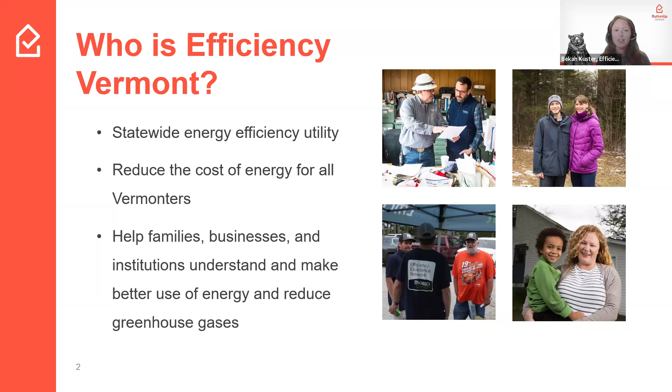We also help to facilitate and sponsor the Button Up Vermont campaign, which is Vermont's annual campaign to help Vermonters prepare for winter. This is really a campaign made possible by a statewide collaboration of so many different partners, including utilities, community action agencies, town energy committees, so many folks who come together each year to make this campaign possible. If you're interested in learning more about Button Up Vermont and all the resources available, there's a great website, buttonupvermont.org, that you can visit, and that's also where you can find all the recordings and information from previous Weatherization Wednesdays.

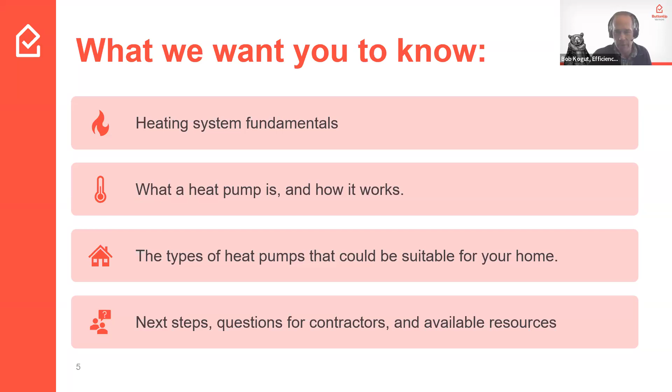A good place to start is to ask yourself some questions about what you want from a heat pump, and what are your goals for using a heat pump. What do you want it to do for you? Those questions might be, I want to reduce my energy expenditure. It might be, I want my home to be more comfortable. Goals might be, I want to be able to cool it in the summer on the hottest days. Starting with your goals is a good place to start.

And then the next thing to think about is, what do you currently have in your house? What's your current heating system? What's your current cooling system? What's your distribution system? That means, do you have ducts, radiators, an in-floor kind of distribution system? And then, what's your budget? Those are probably the best places to start, the first things to think about.

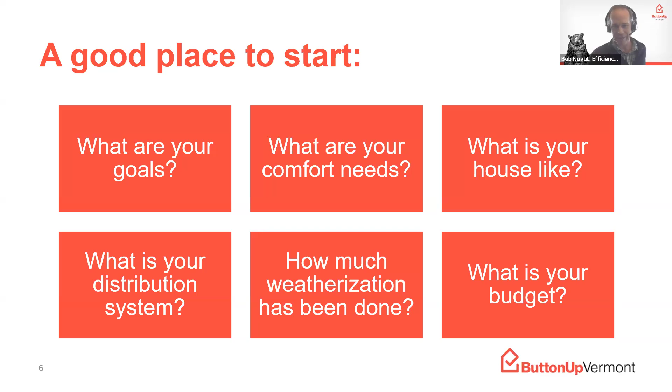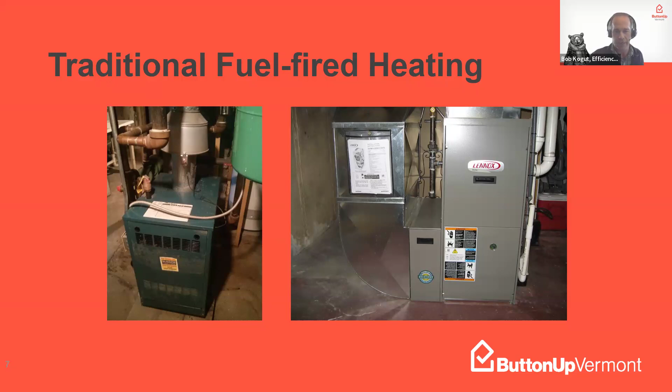So just a quick overview of traditional heating systems in homes. Generally, they burn stuff to create heat and distribute that heat through your home. We're looking at a couple of furnaces here in basements. Common ones in Vermont are oil burning furnaces, propane furnaces, and in some areas of the state, more Chittenden County, natural gas burning furnaces. And then, also probably in a later slide, wood burning - pellet stoves and traditional wood stoves as well are traditional heating systems. All of them burn something to create heat.

Different types - usually, boilers is one type. That's a furnace that heats water, distributes the water through your house, and the water is in radiators. It could be in-floor heating. Those systems require the furnace to burn the fuel to create the heat, pumps to move the fluid around through the house, valves to control where it goes. And then the last part that you see in your living spaces is the radiators, which could be - there's a lot of different types of them. Baseboard ones are very common. Sometimes boilers for your heating system can also provide the hot water for your domestic hot water supply.

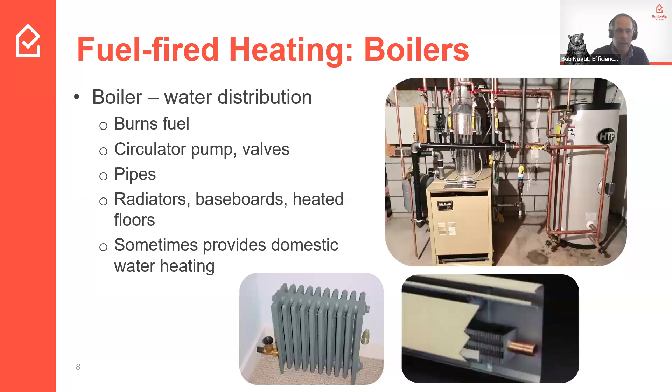Okay, looking at the next slide here. So furnaces - again, I've said this a few times, furnaces burn a fuel. This slide is about more of a forced hot air system. The last slide was about boilers, where your furnace is heating up water that gets distributed through radiators. Another very common system, the one I had in my house before I switched to heat pumps, was a forced hot air system. So there's a furnace somewhere in my house - it was in the basement.

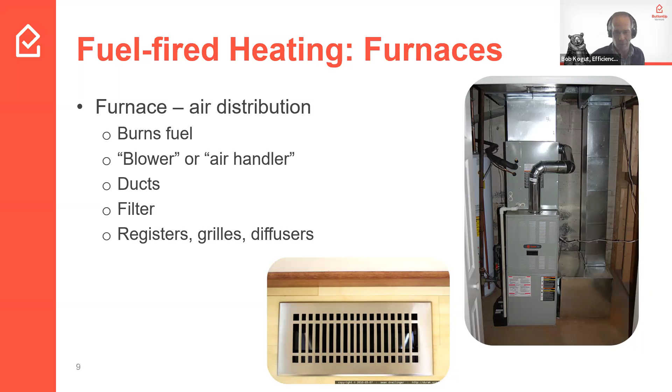Mine was propane, burns propane, creates a lot of heat. And then there are a series of ducts through the house, and there's a blower system called an air handler. Filters are involved in that system to filter the dust out of the air. And then the thing at the bottom of the picture here is a register, a grille, or a diffuser - all names for where the hot air comes out in your house.

Heating systems without distribution would be a wood stove, a classic example in Vermont. That means there's no pipes to move warm water around throughout your house, and obviously no ducting. They heat rooms well - open floor plan houses can be heated pretty well without a distribution system. Wood stoves are common, as are pellet stoves, things like Rinnai heaters, and electrical resistance heaters.

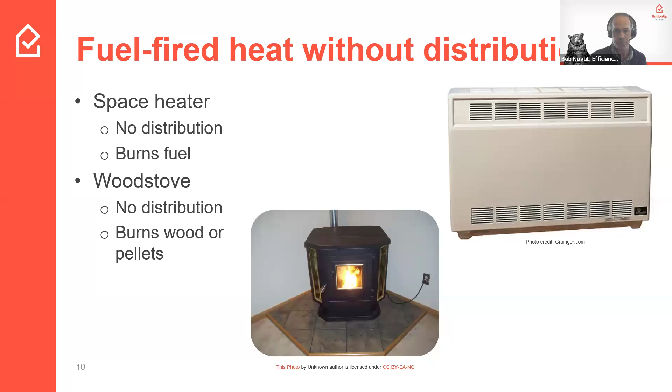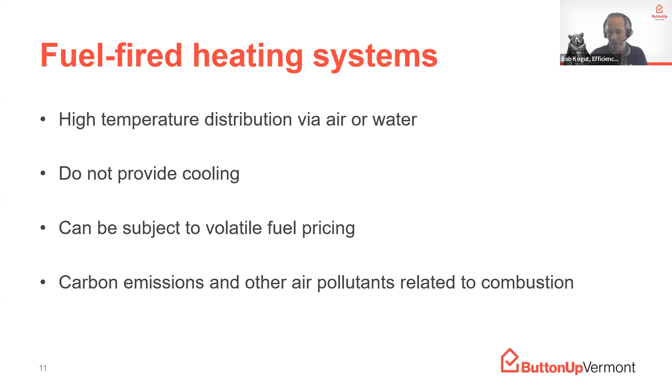So what are some of the characteristics of fuel-fired heating systems? They create high temperatures - burning things creates a lot of heat. They do not provide cooling in any way; no furnace can provide cooling. Oftentimes the cost of the fuel you're burning can vary a lot, and that's true for oil, propane, even cordwood. And then anything you burn creates carbon emissions and air pollution from burning that fuel.

So what about heat pumps? How are they different? Heat pumps run on electricity. They don't burn anything, and they can also provide cooling. A typical heating system we discussed earlier, the furnace, you burn something to create heat and spread that heat around your house. A heat pump moves heat from one place to another. So it's an interesting system.

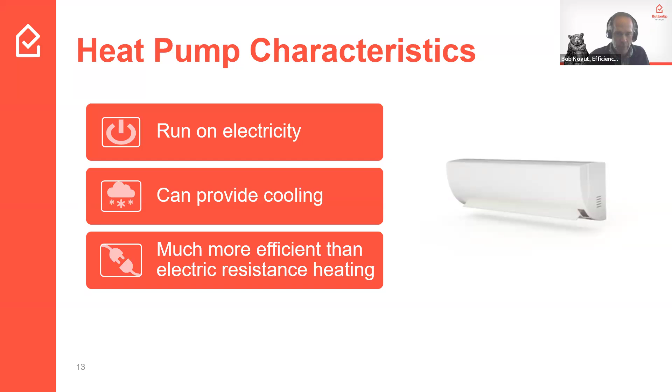What it does is move a special fluid called a refrigerant around through a continuous loop. That refrigerant, through the use of a compressor built into the system and what's called an expansion valve which drops the pressure, lets you pump heat into this fluid, and out of this fluid, through your house.

So a heat pump typically always has two different radiators, which can be called a condenser or an evaporator. One is inside your house to either push heat into your home or create a cool surface in your home. The one outside is either gathering heat from the outside to bring inside, or expelling heat outside if you're cooling. One of the magic parts of a heat pump is that they're reversible - a series of valves let the thing run essentially backwards.

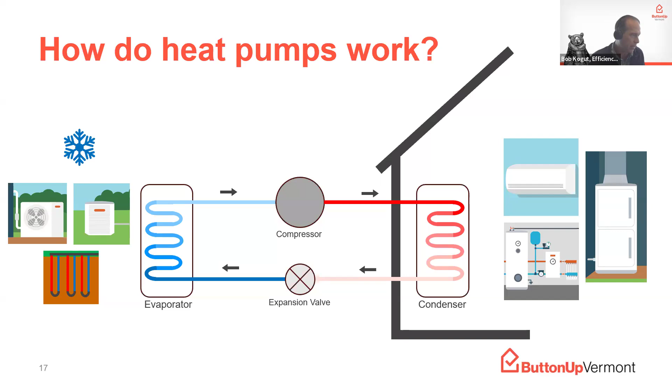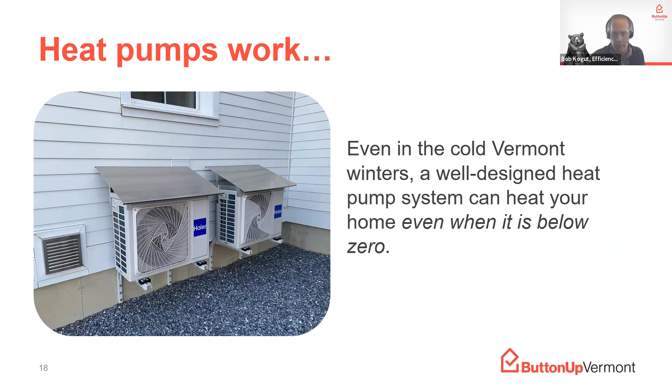This is showing a couple pictures of what an outdoor unit looks like, kind of the graphics, and then the indoor unit - they come in different styles. I believe later we've got some pictures of actual ones, which should be more helpful. Point I made earlier, but reiterate it - here's a picture of two outdoor units of a heat pump system. Like I said, they can provide heat into your house even when temperatures are below zero, down to as low as -20 Fahrenheit.

So there are 4 different types of heat pumps, which I'm going to cover the first 2, and Steve's going to jump in and cover the second 2. The first one is called a ductless heat pump, also called a mini split, which I'm sure many have heard that terminology. The other kind is a ducted system - we'll get into that. Steve's going to do air to water, and he's going to do ground source, also known as geothermal.

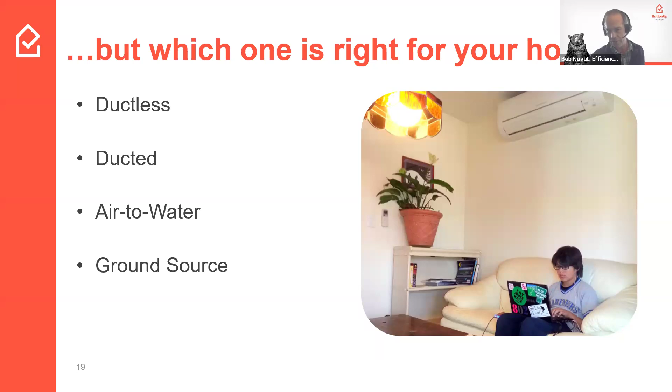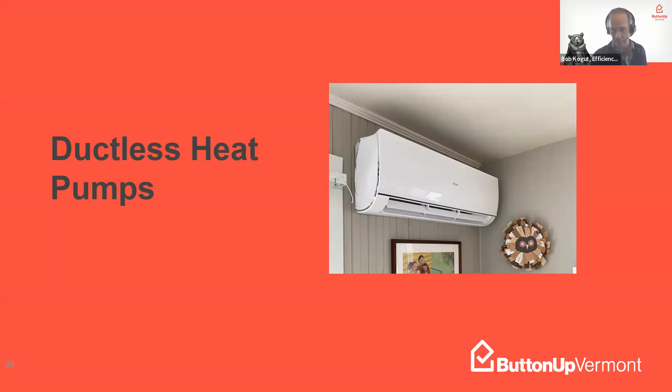So ductless - here's a picture of a typical indoor unit. This is mounted high on a wall, providing heating or cooling inside your house. There are other options other than these wall-mounted, near-the-ceiling units, but those are quite common.

So I guess they can also be called one-to-one heat pumps. I haven't heard that term a whole lot myself. Ductless and mini split are the most common terms. They could be one-to-one, where they always have an outdoor unit and always have an indoor unit. But it doesn't always have to be a one-to-one setup.

Ductless heat pumps can have an outdoor unit and multiple heads inside the house, where that refrigerant fluid is heated or cooled in the outdoor unit and then piped into the house, sending it to a couple of different heads. There are some downsides to doing it that way. If you have one outdoor unit powering three inside units, you have a big powerful outdoor unit, and if you only need heat on one of the inside ones, you might be essentially oversized for that. But those are details you can get into later with your contractor about what's the most efficient setup.

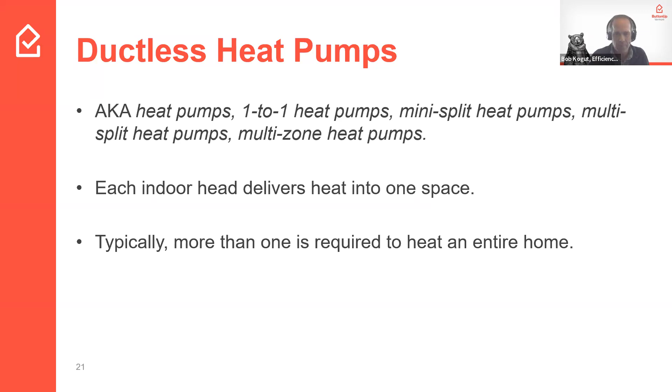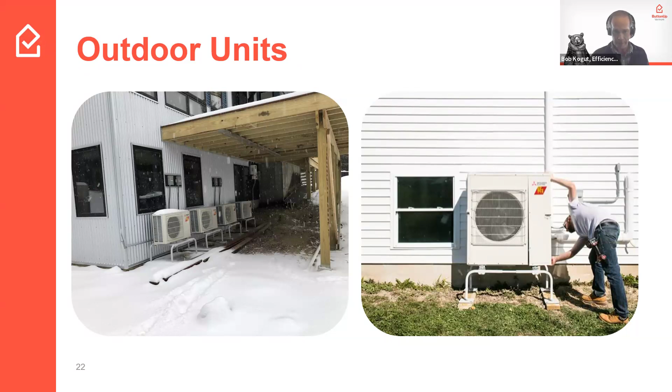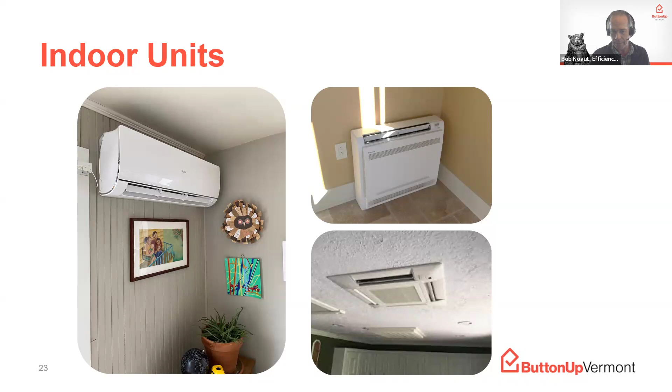Okay, indoor units. I promised a couple options other than the unit on the left, and here's a couple of photos of what some indoor units can look like for a ductless system - this lower wall-mounted radiator type style on the upper right, and a ceiling-mounted system that is hidden between your rafters up there.

Okay, ductless heat pumps - typically these are the least expensive and the easiest to install. They can be used in a lot of different ways, and oftentimes they're a good entree into the heat pump world. You can get a single mini split, a single ductless heat pump, in maybe the room you use most often in your house - your largest living area - and they can be used to supplement existing heating systems. You can also get multiple ones and heat a whole house with ductless heat pumps, depending on how you design the system and lay them out.

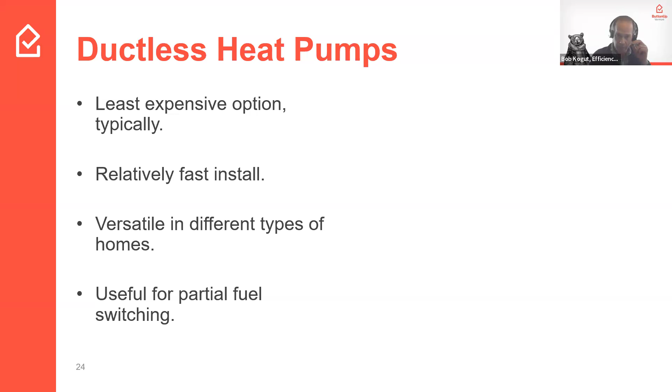This is true of all heat pumps, but we'll probably make this point a few times through this webinar: you should first think about weatherization before improving or changing out your heating system. The better air sealed your house is - air sealing is very important - and the better insulated it is, the less you're going to have to spend on heating, no matter what your heating system is. You'll be able to buy a smaller and cheaper heating system if you have an optimal home in terms of weatherization and air sealing.

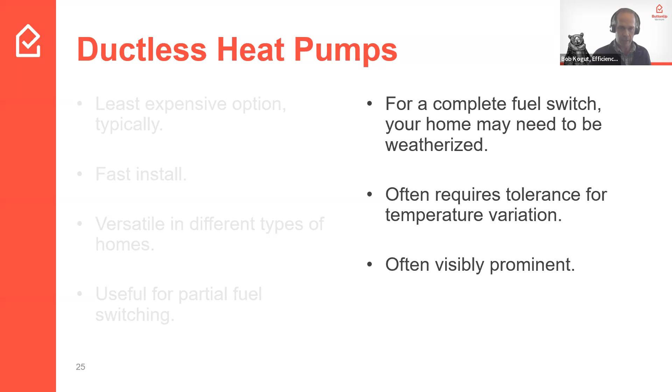So where do ductless heat pumps work well? Again, like all heat pumps, you're going to get the best performance if you do some weatherization first. That is almost always the best bang for your buck - spend a dollar to improve your home to reduce your energy costs. The most efficient way to spend your money is to start off with weatherization.

Because ductless heat pumps don't have distribution - you don't have a duct system, you don't have fluid moving through radiators you can put in different places - they're best for open layouts. Because if you've got a house that's cut up into a lot of different rooms with walls in the way, you're not going to be able to move the heat from that one large room into those small rooms, kind of like a wood stove, which I'm sure many people are aware of how that works in practice. They are a great choice if you just want to add heating and cooling to a particular room, like if you built a new rec room or something - it's a great choice to extend your heating system to a place that maybe hasn't had it before in your house.

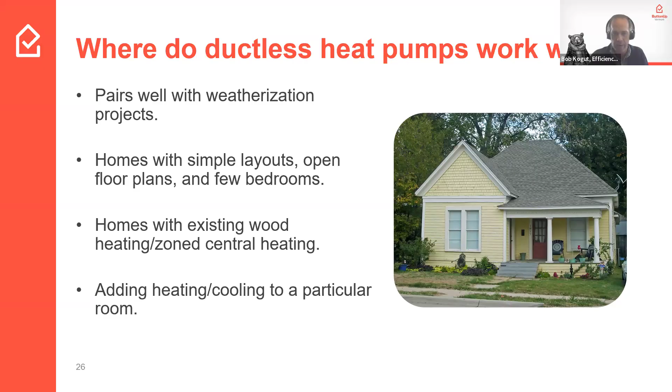Okay, ducted heat pumps.

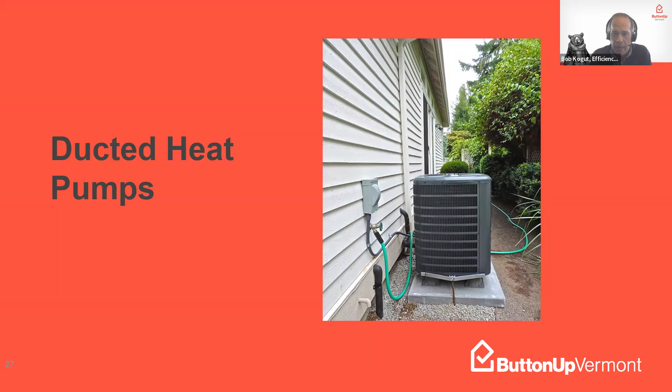Here's a picture of an outdoor unit of a ducted heat pump system. The only difference between this picture and some of the ones you saw before of outdoor units is this one looks a little bigger, which is generally the case. A ducted heat pump system is designed to be a central heating system for your whole house, so the outdoor unit will be a little larger in size to have greater capacity. It is exactly the same technology though as a mini split. The same stuff is going on under the hood.

A ducted heat pump system is also called a central heat pump, and there are two subtypes called the centrally ducted and the compact ducted—details we don't need to get into here. There's a couple of pictures. The one on the right is showing a fairly typical looking indoor unit of a ducted heat pump. That black thing in the middle is the heat pump unit itself, and you can see the galvanized metal kind of ducting on the right, where the air handler unit is blowing the warm or cool air into that ducting.

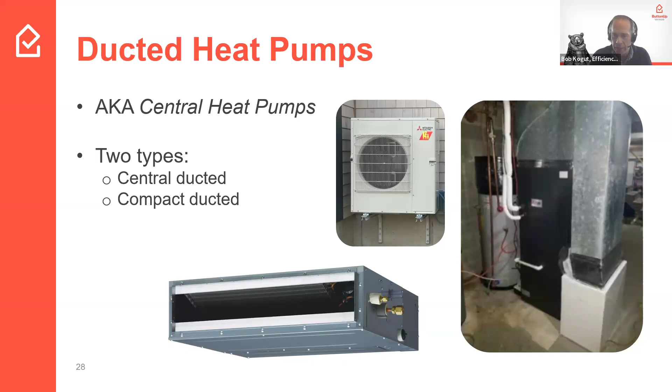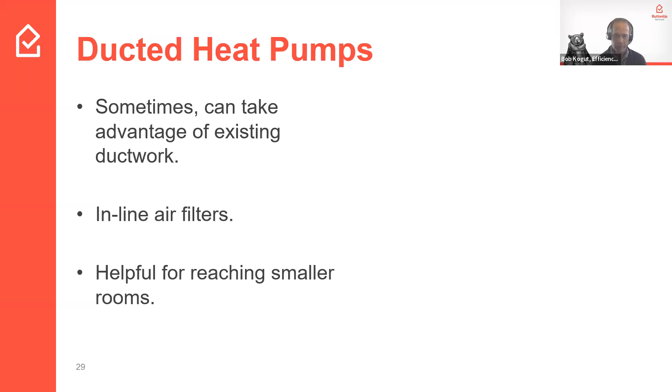Ducted heat pumps can sometimes take advantage of your existing ductwork, and they include air filters, which most forced hot air heat systems do, but it's a necessary part. You can run ducting anywhere in your house, so you can reach smaller rooms, and you can maybe duct it up to different floors as well.

Typically, a centrally ducted heat pump system is more expensive than a ductless system. In many cases, you might have to improve your ducting, but you can work with your contractor for that. And you have to have ducts—you can't have a ducted heat pump system without the existing duct system in your house, or the ability to add a duct system into your house.

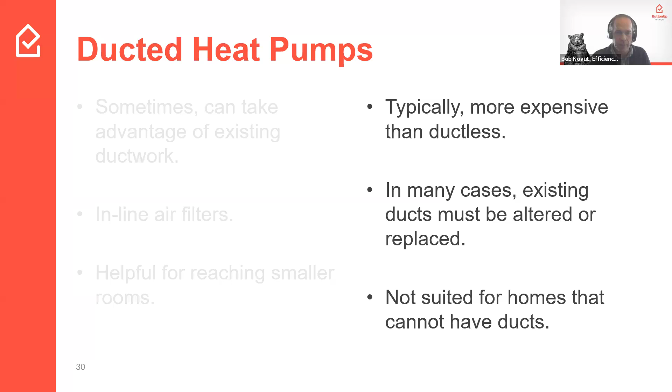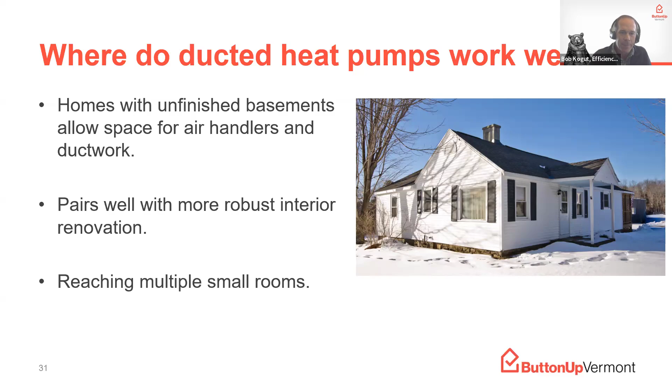We'll continue to try to answer those as best as we can. Also, a lot of these are going to be very site specific and project specific, house specific, need specific to get to some answers on these things. So the technology—Bob did a good job of explaining how heat pumps work, the applications of them here in our climate. We're talking about ductless and ducted heat pumps. Those are the predominant types of equipment we're seeing installed in Vermont and the Northeast for heat pumps at this time, ductless mini splits being the biggest chunk of that equation.

Although we are seeing a lot of these split outdoor heat pump units being installed into existing furnaces. So if you do have the distribution in the home, as Bob was mentioning, for a forced air system, you can benefit from including the heat pump into that existing system, still have the fossil fuel equipment there to supplement the heat pump and get distributed cooling in the house as well. The ductless heat pumps provide that ability to do space heating around the house with the location of the heat pump and get the cooling out of it as well.

What I'm going to talk to you about in the second half of this is some more whole house system heat pump equipment types and designs. This is looking at integrating heat pumps as a whole house heating system, either into an existing distribution system in the house, or building new, or modifying a building to incorporate distribution to accommodate heat pumps.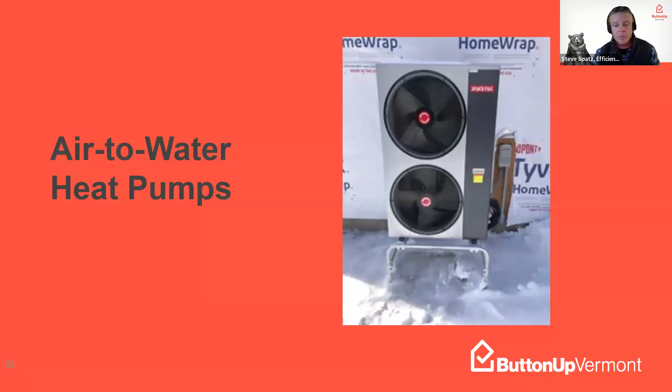Air to water heat pumps have the same essential outdoor equipment depending on the type, but the idea is that you have the refrigerant coil and a fan coil moving air across the refrigerant outdoors that is either pulling heat energy out of the outdoor air for heating purposes, or expelling that heat energy if it's connected to a system that can do cooling.

The difference with an air to water heat pump is that there's a heat exchange occurring. With ductless and ducted heat pumps, the indoor equipment blows air across the hot refrigerant coil and takes the heat energy out of that coil, moving it through the house via air. An air to water heat pump instead takes that heat energy from the refrigerant side of the system and transfers it into water.

Almost uniformly and typically, that hot water created by the heat pump is stored in a thermal storage tank. That thermal storage tank is then used to distribute the hot water throughout the house through a variety of different emitters, as we call them, or radiators, or distribution types throughout the house.

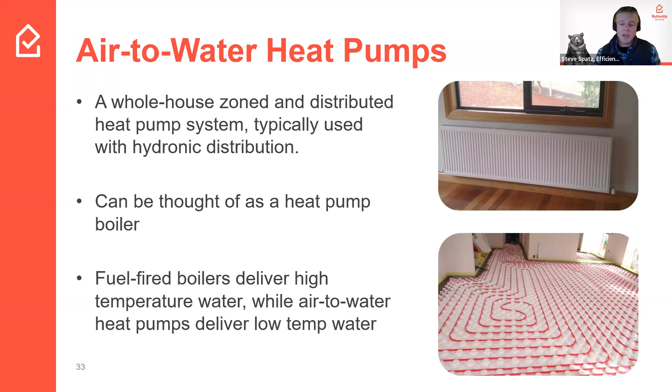Essentially it can be thought of as a heat pump boiler. A lot of the time with an air to water system, we're connecting to a hot water heating distribution system in the house, but there's a lot of flexibility with air to water equipment that allows it to be connected to different types of distribution within a building.

You can mix and match these things if you are building new or completely renovating a house, or you can connect into existing distribution systems within a home. Air to water, because of that ability to draw from a thermal storage tank, gives you the flexibility to either use hot water heating distribution in the house, forced air, or with some manufacturers, connect to ductless heads as you would with a mini split.

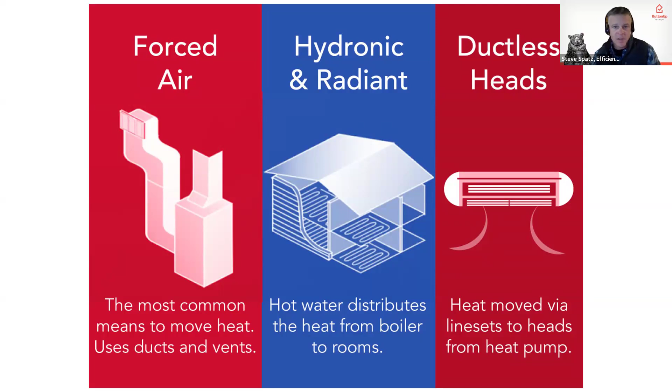This comes down to what's existing in the home - moving that heat energy either through an existing forced air ducted distribution system that may or may not have the capability to meet the temperature the heat pump can do, or conversely through a hot water distribution system within a home.

If you are interested in taking this route, it does take quite a bit of design and some good data inputs from the contractor side of things to look at what the capabilities and capacities are within the existing house to integrate an air to water heat pump into the equation.

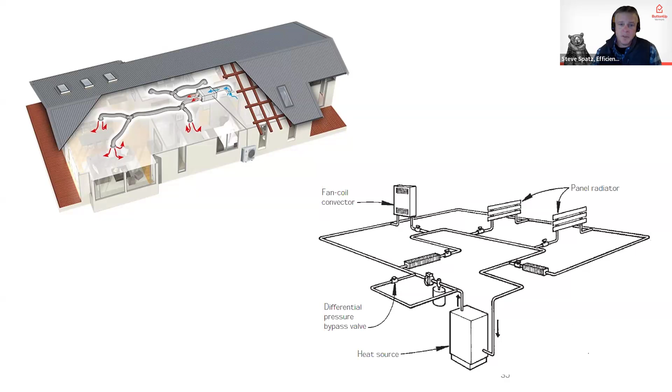If you're designing new, then you can quite easily design a distribution system specific to the capabilities of the air to water heat pump, and really match everything appropriately to get to that full house outcome. There's a variety of different heating emitter types that you can integrate with this low temperature distribution.

You can have standard baseboard that's designed for low temperature water, or taller radiators with a flat panel design that can be set in rooms. One of the typical applications and a great application for air-to-water equipment is radiant floors and radiant heating.

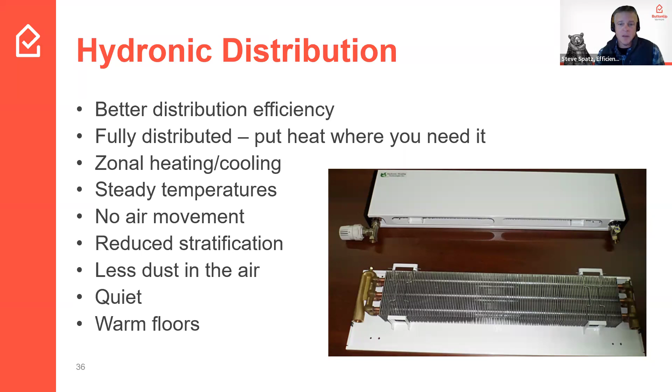Radiant heating with low temperature distribution, either with air-to-water heat pumps, geothermal, or a really well designed propane or gas heating system, doesn't give you really warm floors because the water temperature needed to heat the house can be quite low. The floors aren't cold, but they won't be warm to the touch like a high temperature radiant floor system. That just shows how efficient the heat pump equipment is at heating the house at lower water temperature—you get higher efficiency by lowering that water temperature, plus flexibility in how you distribute heat throughout the house.

Air-to-water heat pumps look similar on the outside to a ductless or ducted heat pump. Typically the outdoor unit is a bit bigger and usually has two fan coils rather than one.

You're either moving heat energy from the heat pump through glycol and water to the outside unit, or just using a refrigerant loop from outside to inside. The simpler the system design, the less expensive it will be, and the easier it is to maintain and service. These don't need to be complex systems—frankly, the less complex they are, the more efficient the system will be, and easier to service and maintain long term.

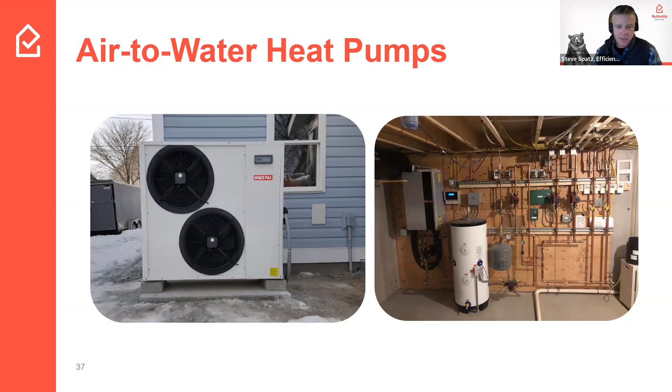So to summarize, air-to-water heat pumps can be thought of as a whole house system. You're either designing a distribution system from the ground up to accommodate the potential of the heat pump, or potentially retrofitting an existing system to integrate a heat pump.

You can size and design the system to run completely off the heat pump, with some integrated electric resistance backup heat in a thermal storage tank, or you can pair an air-to-water heat pump with an existing or new boiler to back up the heat pump water heater or get other functionality out of it. There's a lot of flexibility in how you can size and design these systems.

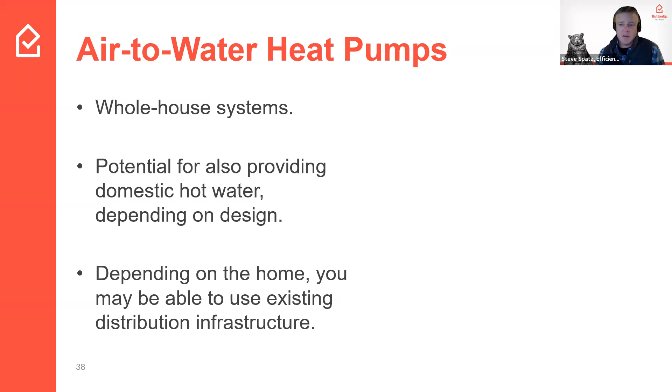Technically, you could use an air-to-water heat pump system to do your domestic hot water heating as well. It all comes down to careful design, doing appropriate load calculations, and knowing your capacities in the house to integrate this type of equipment.

But it's not yet at the point with this equipment where the heating capacity or water temperature it can create makes it a quote-unquote plug-and-play replacement for an existing oil, gas, or propane boiler. Because of that, in existing buildings there are often improvements and changes needed to the distribution equipment in the house for the air-to-water heat pump to really deliver the benefit.

With hydronic heating in the house—baseboard radiators, wall radiators, or radiant heat—that doesn't allow for the cooling benefit to be utilized with an air-to-water heat pump. You'd need to add some other type of ductless wall head or forced air ducted system to benefit from cooling. But again, the system equipment and design is highly flexible, so you could incorporate all of these things into a system with the right design.

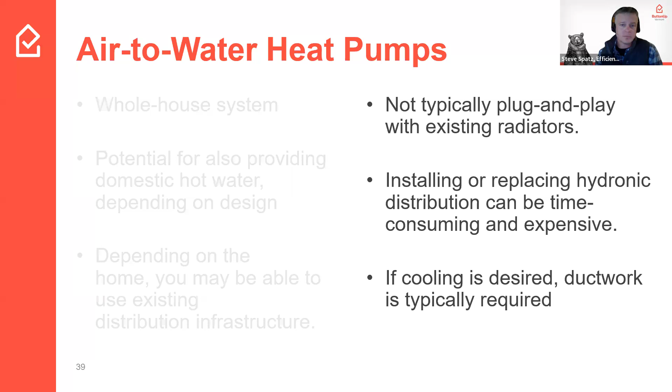So to reiterate some of these points: low temperature emitters that are already there, like radiant floors, can often be a great retrofit application without changing anything. You also benefit from the ability to zone your heat throughout the house, which isn't necessarily something you can do with a standard, typical forced air heating system.

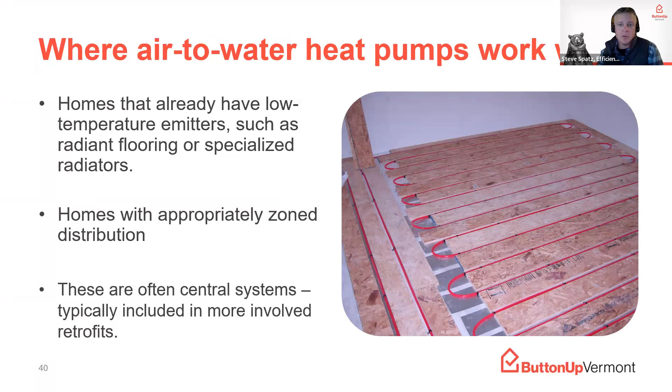And so now finally, we'll jump into ground source heat pumps. These have some similarities to what we're looking at with air-to-water. They're typically connected to whole house distribution systems, oftentimes forced air systems, but geothermal can also work well with low temperature water hydronic heating systems.

The differential here with a ground source heat pump is that we're using the ground as the heat sink to pull heat energy from for the heating side of the equation, and then expelling heat into it for the cooling side. There's consistency in the earth for temperature and a consistent BTU load that can be drawn from or pushed to when using a ground source system.

Whereas with an air source system, you have variability in the outdoor air temperature, which affects the performance of the heat pump throughout the season. So you do have differentials in the overall efficiency of operation depending on the outdoor temperature. The lower the outdoor temperature, the lower the efficiency of the system goes. The higher the outdoor temperature, the higher the efficiency of the heat pump will be.

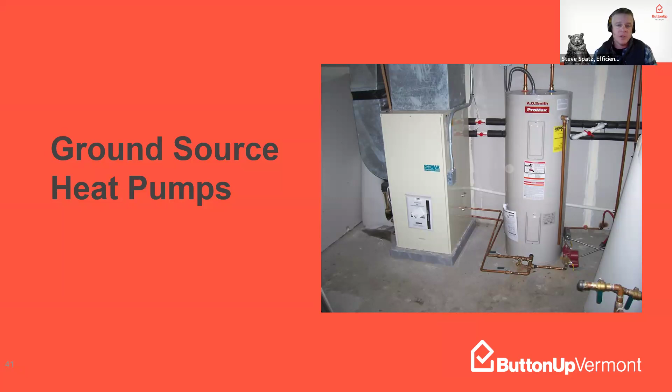A ground source heat pump often has a very consistent level of efficiency throughout the entire heating and cooling season. So the main thing you're investing in with a geothermal heat pump system is that heat sink side of the equation. Rather than just having a piece of equipment moving air across the refrigerant coil, with the ground source system you have to find your way into the earth.

So you either have to drill vertical wells with piping put through them to move water and glycol through to do the heat exchange, or do a horizontal trenching type system, or sometimes use a water source like a pond, a lake, or a river.

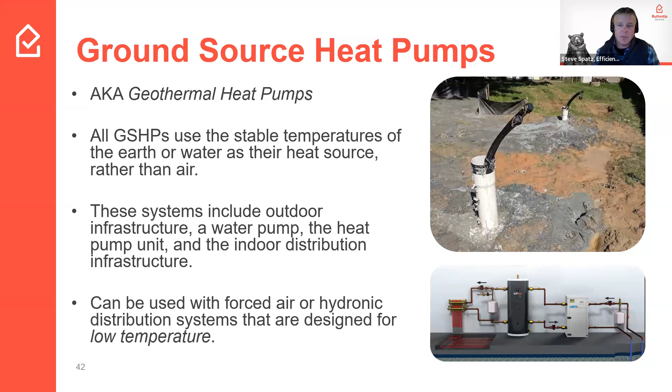Most of what we see for ground source heat pump equipment or geothermal equipment in Vermont are vertically bored wells that are either open loop or closed loop. We're utilizing the heat energy in the bedrock of our area, of our geology, as the source for both extracting heat and dumping heat for the cooling side of the equation.

These are low temperature systems, so again we have consistency of temperature and consistency of performance throughout the season. The two typical well types are closed loop and open loop. A closed loop system involves drilling the number of wells to a specified depth for the amount of capacity you need for the heating and cooling load of the house, based on tons of heating and cooling capacity needed.

Okay, well, while we move through some... okay, we were on, let me go back to the slide. I guess it just stopped sharing, or it's sharing but let's see, we're on air to water. No, we're on geothermal, my bad. There's the open loop and closed loop well. Can you see it now? I'm not seeing it. All right, Bob, are you with me? One second. Here we are. Well, this is different, hold on, I'm gonna switch. Okay, yeah, I see something now. All right, how's that? We're back. That looks good. All right, amazing. No idea what happened, but there we go. No problem, small hiccup.

So just quickly, I'll get through this. Closed loop is a closed system. You're drilling wells, putting plastic tubing down into those wells in a loop, in a series depending on the number of wells. They're connected to the heat pump in a closed system charged with water and glycol, and you're moving that fluid through those wells to do the heat exchange.

An open loop system is where you're actually pumping and pulling water from an aquifer down below the ground. You're moving that through the heat pump, and the downside of the heat pump expels the cool water in heating mode, where you're extracting heat, taking the heat out of the water through the heat exchange of the heat pump, and then pushing the cool water back into the well, typically, or sometimes that water can just be dumped on the surface of the ground.

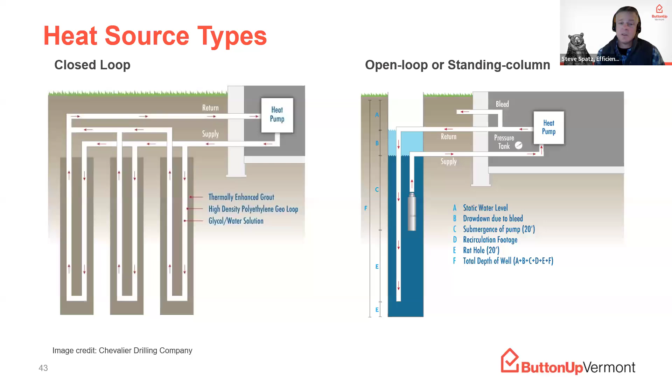So these are the two types of ground loops you'll see with a geothermal heat pump. Depending on the driller, the contractor, and the geology, either type of these is utilized here in Vermont.

As noted, you can get consistency of temperature in the ground, so these systems can operate with really high efficiencies when properly designed. I was out with one of our partner contractors on Friday in Townshend going through the startup of a geothermal system. By adjusting the water flow through the system and other parameters with the equipment, you can actually dial in what the efficiency will be. That piece of equipment, as we commissioned it on Friday, had a coefficient of performance of 4, which is the term used for efficiency with heat pumps. The equivalent of that is essentially a 400% efficient heating system compared to an electric resistance system, and that would be consistency throughout the heating season at that level of performance.

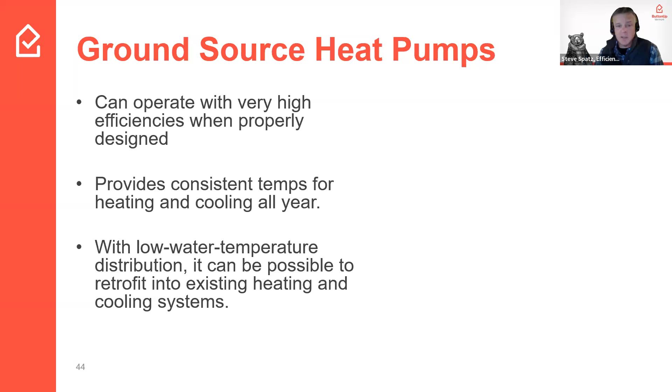A geothermal system can be retrofit into potentially an existing hydronic heating system, but more often into a forced air system, so either type of distribution can be utilized with geothermal systems. They are expensive because you're investing in that heat sink. The big investment is drilling the wells, grouting the wells, piping, and everything it takes to do that, and you have to have the space to be able to do it.

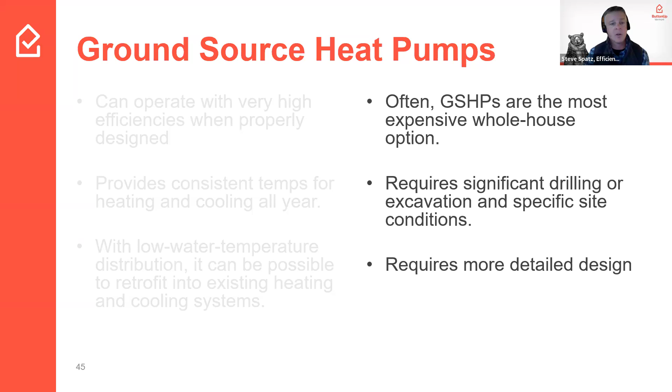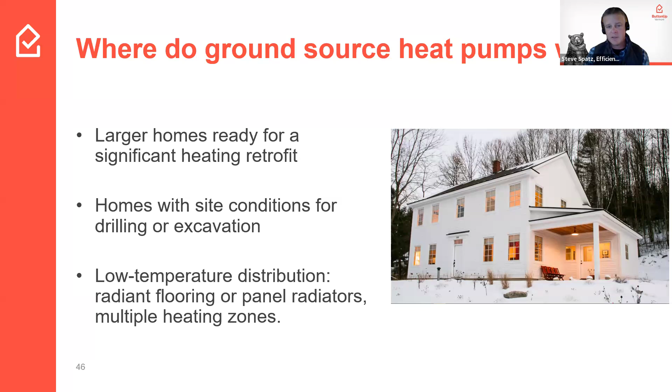There's good support in the industry to design and install these systems, and a lot of experienced drillers in the state that do geothermal wells as well as domestic water wells. So there are a lot of resources in the state to utilize if you're interested in geothermal. But again, it is the expensive route out of the heat pump options we're talking about here. Buildings with high heating loads that have the right distribution can be a good fit for geothermal in an existing building, but you have to have the right site conditions and geology to make it work. Low temperature distribution is still the crux of utilizing the best benefit with geothermal and with air to water.

To summarize the different types we've talked about: we've got ductless, which is kind of a space heater approach, decentralized, not distributed throughout the building. It's a straightforward installation at the lower end of the cost spectrum, but if you want to do your whole house with them, it requires multiple units to get to that outcome.

Ducted equipment can be small scale distribution off of a small air handler connected directly to the heat pump, or the heat pump can be connected to an existing furnace or air handler to do heating and cooling distribution throughout the whole house. So it's a little more complex and expensive than a ductless unit, but does yield towards the whole house approach.

And then with air to water and geothermal, you're looking at low temperature whole house heat pump systems where you're really aiming to utilize the heat pump as your primary heating system for the whole house. You get the same level of flexibility, comfort and consistency throughout the house with the distribution that you would get with typical fossil fuel heating equipment.

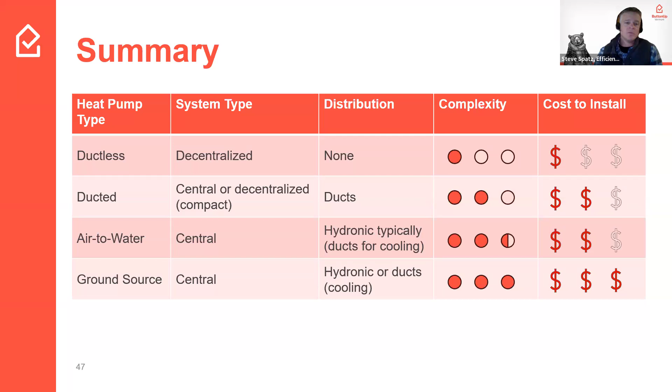So here are some resources about how to take this further and explore your options for potentially utilizing a heat pump in your own home. Think about what you want to do with it — what's your primary interest in the heat pump? Do you want to shave some of your existing heating load from your existing fossil fuel system onto the heat pump, either for cost savings or other interests?

That's something to consider. Are you trying to get better, even heating in parts of the house that don't have good distribution from the existing system? Are you primarily interested in cooling, and maybe want to benefit from the heat pump a little bit during the heating season when you can? Or do you want to go whole hog and try to utilize heat pumps to do all of your heating in the home?

So there are a lot of variables that go into play about what's the right system or approach for you, considering what it means to be comfortable in your home and how a heat pump can benefit that. If you've had a baseboard hot water heating system in your home forever and that's what you've gotten used to, and you install a ductless heat pump, realize that you're going to be getting that heating from air moving across you and across the room. So that's something to consider as well — it's a different way of delivering heat and comfort in the room.

The layout of your home, the distribution of what's already in the home, and weatherization are all factors in determining the best fit for equipment type for a heat pump in a building. It's always the best approach to make sure you've done whatever is financially and reasonably possible to the home to lower the heating and cooling loads. So investing in tightening up the house is always the best first step before changing out any heating system or incorporating cooling, so that equipment works as best as it can and costs the least to operate.

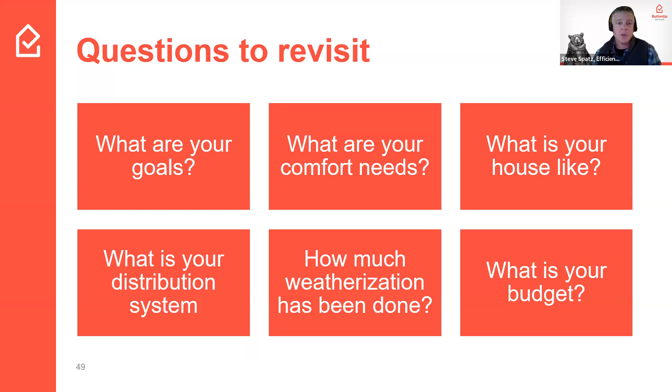So looking into your options for improving the building envelope is always a great place to start. Efficiency Vermont has our home performance contractor network of trained professionals who work in that space of weatherization that you can work with, and we recommend that you do.

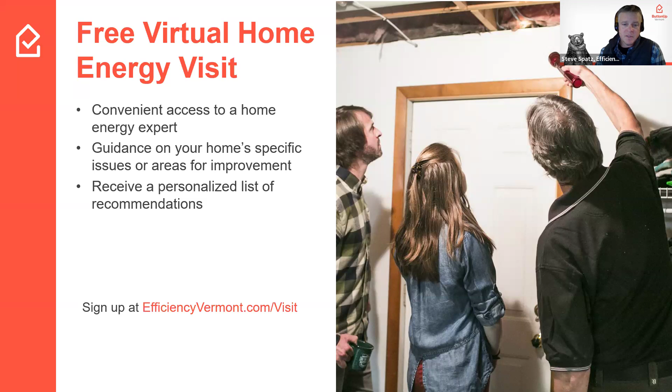Efficiency Vermont also offers a virtual home energy visit where you can connect with one of our energy experts who will talk through your home specifically, answer your questions, give you an overview of your opportunities, and connect you with a list of recommendations and next steps. You can sign up at efficiencyvermont.com for that service.

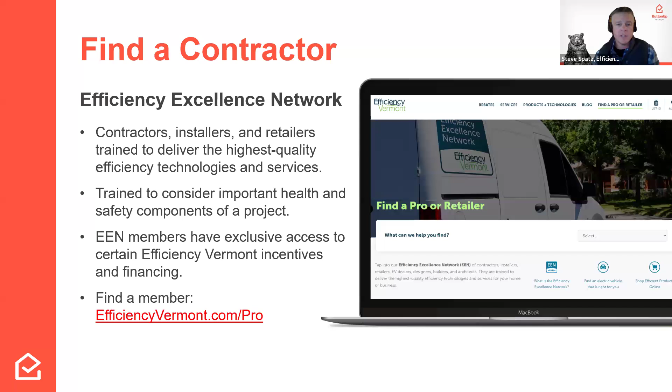On efficiencyvermont.com, we also have our Find a Pro tool. This is the way to connect with our partner contractors in our Efficiency Excellence Network. Through that tool, you can search for a variety of different contractor or professional types, from weatherization, heat pumps, to architects, designers, lighting professionals, electricians. It's a great tool to look at. You can search based on your zip code as well, so you'll be able to pull up local contractors for the services you're interested in.

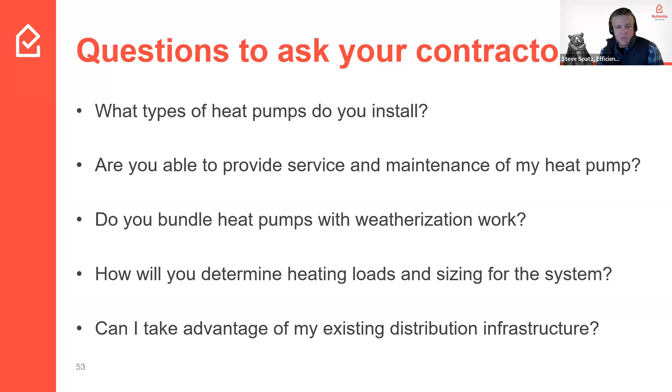If you are going to be talking to a contractor about putting in a heat pump, get a sense of what they do. Not every contractor installs all types of heat pumps; some install just specific types and specific manufacturers, so get a sense of their capabilities. It's also worth asking if they service and maintain heat pumps after installation. Some will, some won't. If the company doesn't do services beyond installing heat pumps for HVAC, you may want to network with an energy auditor or home performance contractor who could look at your potential for work on the building envelope. Any heat pump installed should have appropriate load calculations done to size the equipment for the space and building, so ask the contractor how and if they do that calculation. Those are some considerations to take when talking to a contractor.

Air to water and ground source heat pumps are a project level rebate process, so these are not point of sale discounts. These are actual rebate applications submitted to us on a project level basis, but there's some pretty good money on the table for that type of equipment as well.

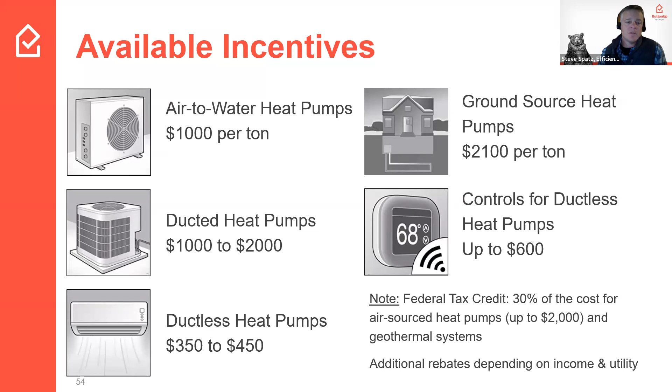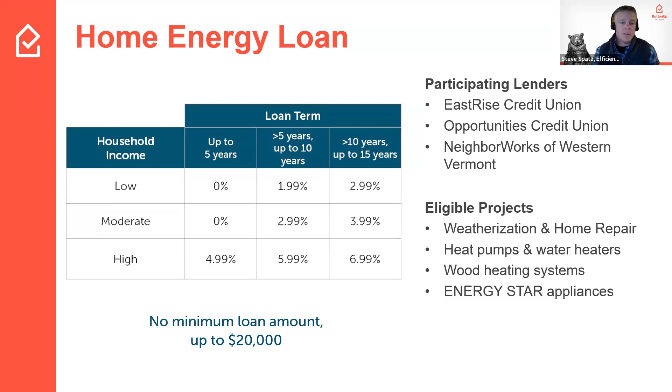If you work with one of our EEN partner contractors, they will be able to offer you access to a financial tool, the home energy loan. This is a low or no interest loan offered through our partner lenders. If you're interested in financing a heat pump installation, heat pump water heater installation, or weatherization, those are all types of measures that can be financed under the home energy loan. Depending on your household income, you can finance that for down to 0% interest. You do have to work with an EEN contractor to benefit from that offer, but it's definitely something to take into account.

Another financing offer is working with a partner in our weatherization repayment assistance program, where you're able to finance eligible measures on your utility bill for up to 15 years. It does not require cost up front, but you can finance that work through a charge that will show up on your utility bill. We have some contractors participating in that program. If you're interested, you can reach out to us directly or ask your contractor about it when you speak to them.

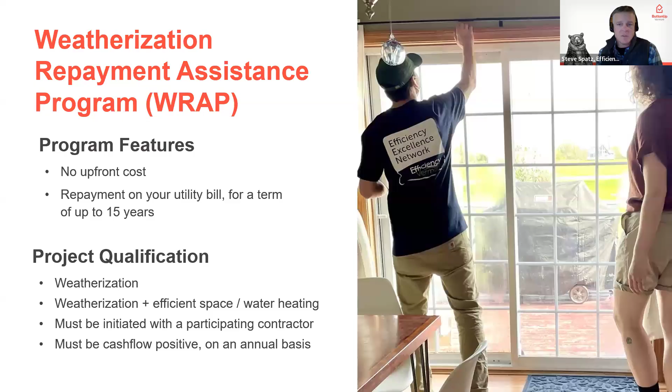So that wraps up our content here on heat pumps. I have been seeing some more things popping up on the chat as we've gone along, so we can open up to further questions at this point. Yeah, a lot of questions in the chat. I think a lot of them are being answered, but I'm happy to go back to those. We did get some questions coming in through registration, many of which have been answered just through the presentation, but I thought I would touch on a few of them.

A lot of folks asked about cleaning and maintenance of heat pumps, and I want to note that we put a great resource in the chat. Phil, one of our colleagues, also shared that you should clean the filters on the indoor unit every 1 to 2 months and have the system professionally cleaned every couple of years. But curious, Bob or Steve, if you have anything to add about maintenance.

Yeah, somebody asked in the chat about doing a DIY, and the most important maintenance that you do most often is cleaning out those air filters, which you can do yourself — clean the filters or replace them. That every couple of year maintenance you generally can't do yourself unless you're a refrigeration contractor. But the bulk of it is keeping those filters clean. You got anything to add to that, Steve?

Yeah, the filters on the indoor unit — hopefully your contractor will show you where they are and how to clean them. Otherwise, it's going to be in the manual from the manufacturer. If you get a ductless heat pump installed in your house, for the first year or so check those filters every month or so, see how dirty they get, and then decide how often you need to clean them from there. The long-term, deeper cleaning maintenance really comes down to conditions in the home — if you have multiple pets, if you live on a dusty dirt road and the windows are open often, it depends on what accumulates within the system. But there are services available to do those deeper cleanings on a couple year cycle. It's really just like any other type of heating or cooling appliance — maintenance is required. Your oil or propane boiler or furnace needs service every year or two depending on the equipment. It's just something you bake into the fact of it being part of your life. The same mindset should be there in regard to a heat pump.